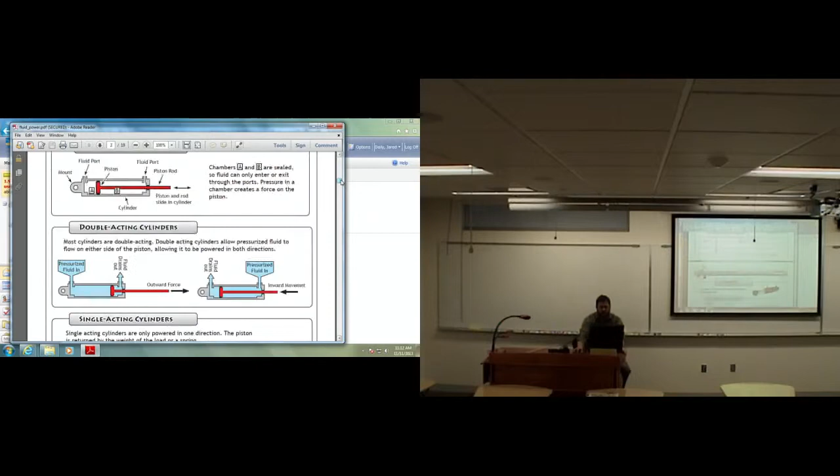So let's take a look at our hydraulic arm project here. I have three documents that I'm going to send you, where you're going to learn about pneumatics and fluid power. These are essentially workbooks. You're going to be learning some things, answering some questions, and doing some activities, all about hydraulics.

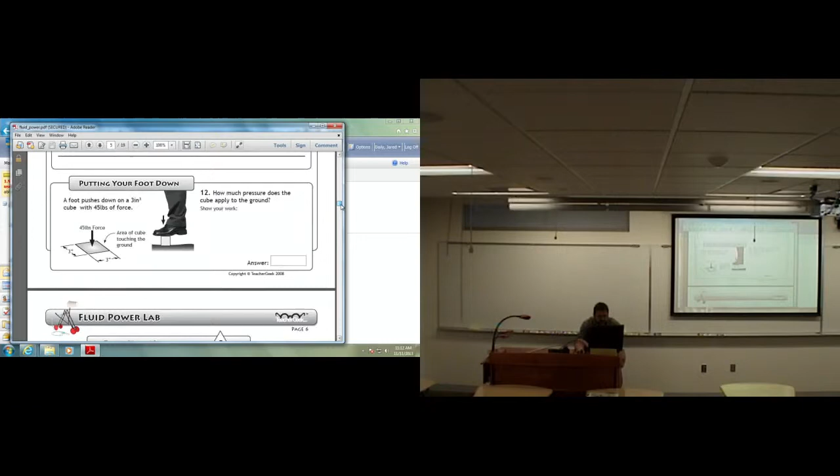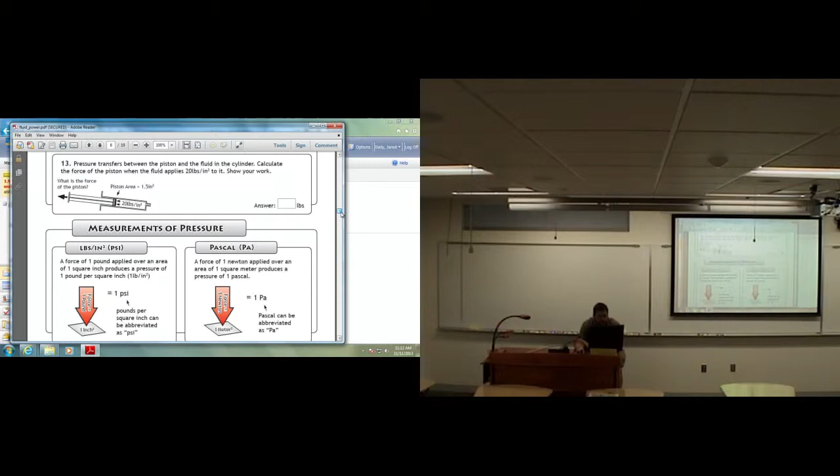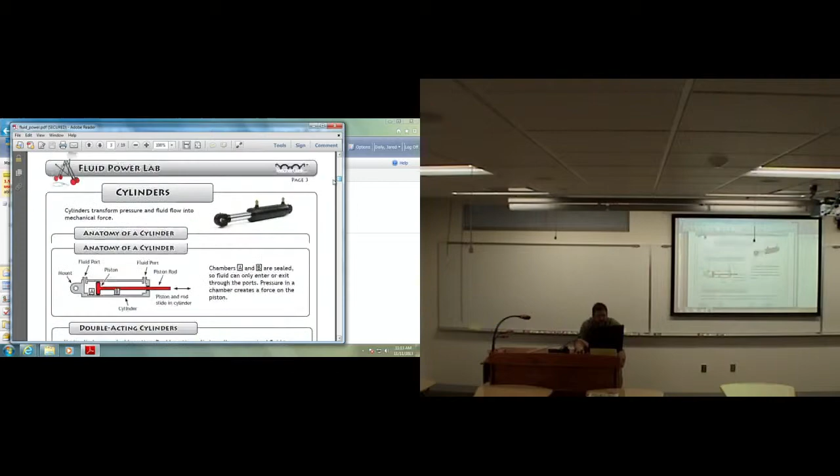And I will send these to you in an email. You have lots of different things to do here, including a little bit of math that's not terribly difficult, so it shouldn't be too much strain on you. If you have any questions, you can talk to me. But we're going to learn about some different laws of fluids and some different ideas with fluids, and we're going to do some simple calculations.

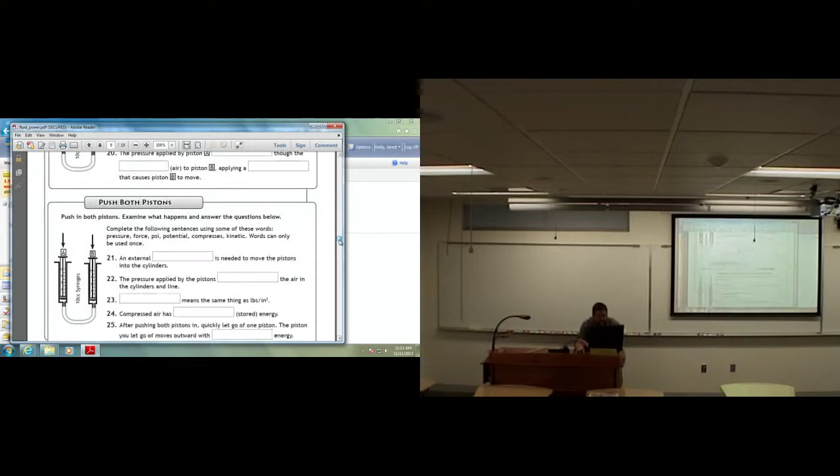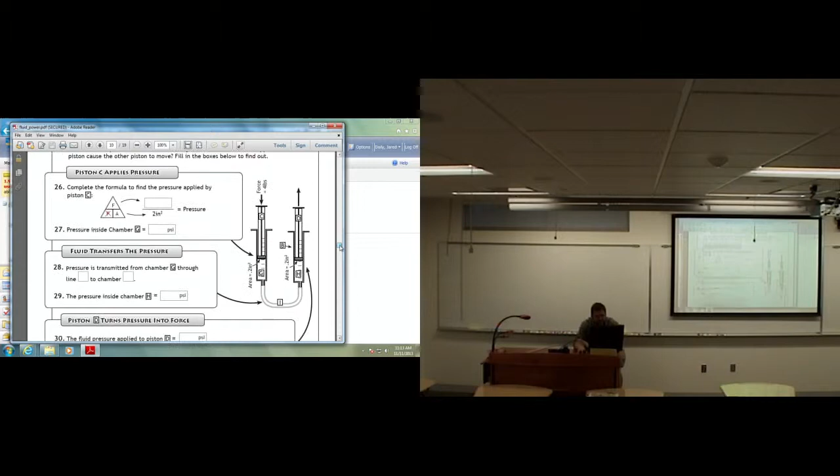Here's the first activity they have. So here we have an activity where we're actually going to put together a little hydraulic system, and we're going to do an activity and write down our results. Here they talk about viscosity, and then they do a very basic hydraulic system to lift a book. And then they talk about some work and mechanical advantage.

So this is fairly involved. It's got, I don't know how many pages, 19 pages on it, and it's a fairly complicated deal here. This ends up with an invention that you're going to make that uses fluid to power it — in other words, uses hydraulics or pneumatics.

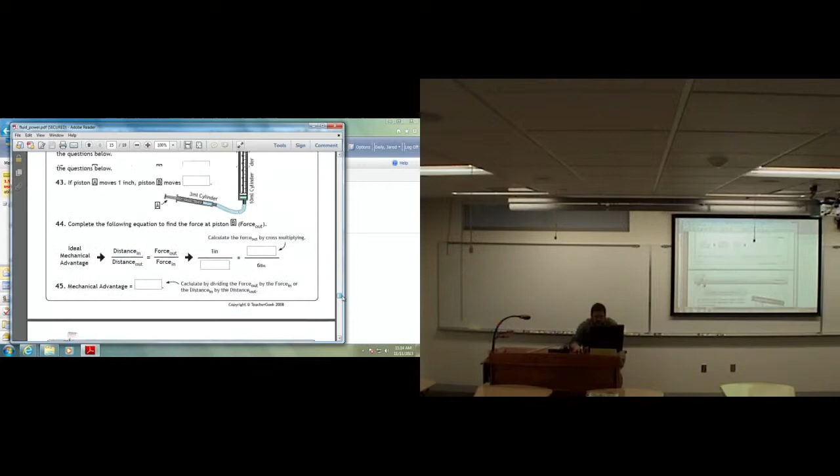And it's going to have to do one of these things: open a jar, crack an egg, or toss a ball. Now, when you're doing this kind of thing, you definitely want to go as simple as you can. The more complex it gets, the more problems there can be, more holes that can be poked in your invention. But in the end, after doing all these activities and all these different kind of homework type problems, you're going to make your own little invention at the end of it.

19 pages long, so you will have until Wednesday to work that out. Now, it's a fair amount of work as far as sitting down and writing things, but you don't actually have to build anything very complex to get that done. It's mostly basic beginning stuff.

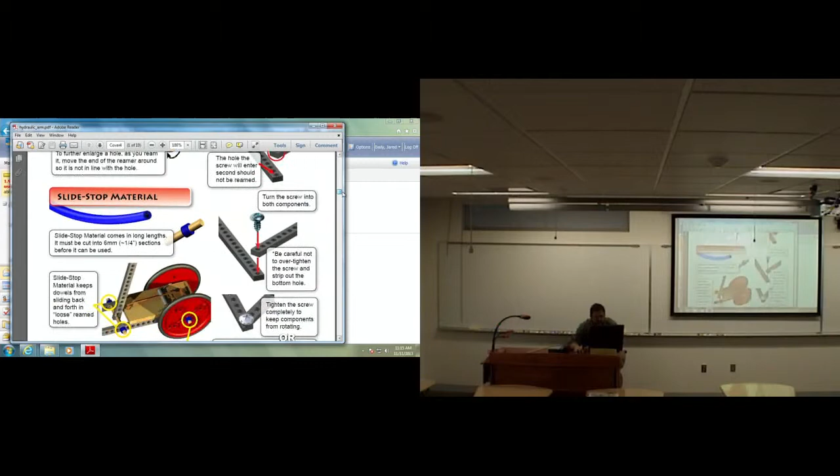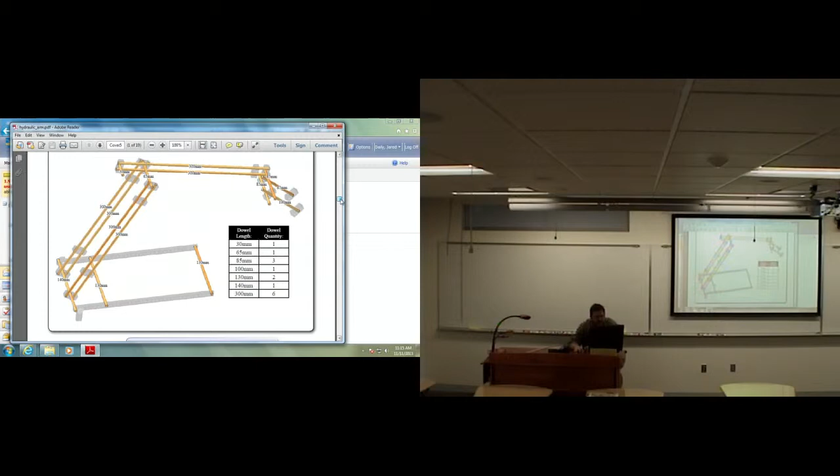The second one I'm going to send you is called the hydraulic arm, where you're going to put together a hydraulic arm from the materials I've given you. Now, I don't think you should have the proper number of materials for this project. It looks like it requires quite a few dowels, which I didn't provide for you. And is this actually the arm I want you to do?

Let's look at a different one. There's a different one I want to look at. This one is the very advanced arm. No, that's not the one I want to do either. So I want to do this one.

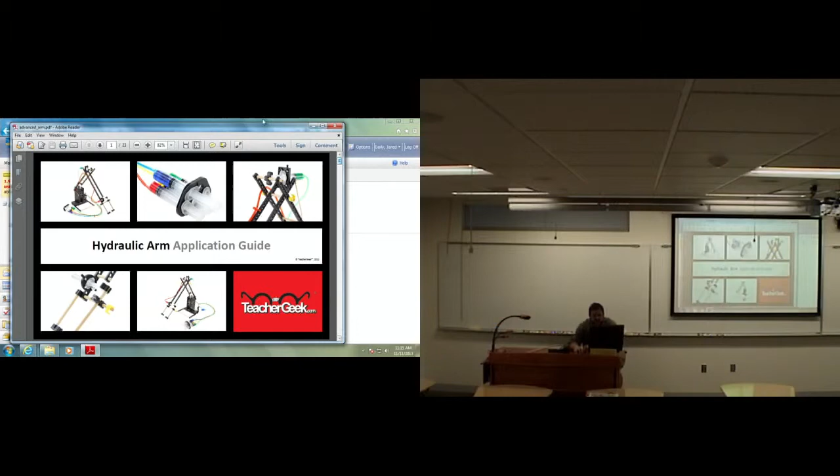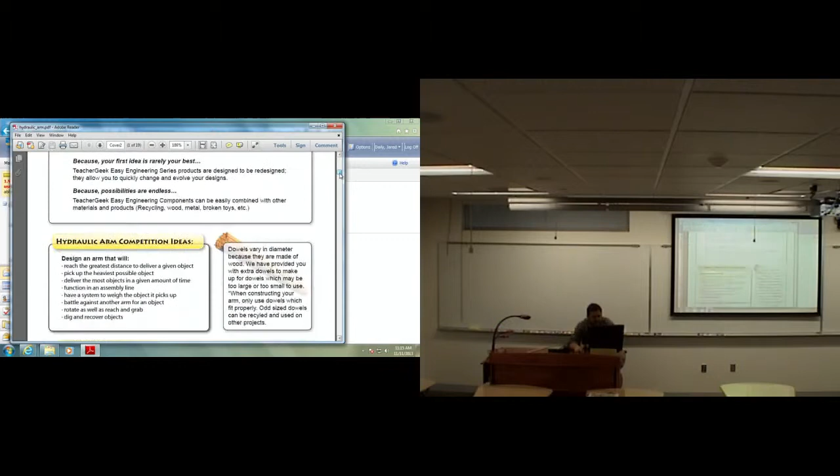So this is the second one, the second page of the paper I'm going to give you. It's also 19 pages, and they have you using these plastic arms and dowels and everything else, but you're not going to necessarily have all the parts left over to do this. So you'll have to decide what substitutions to make and how to use the parts you do have to accomplish this task.

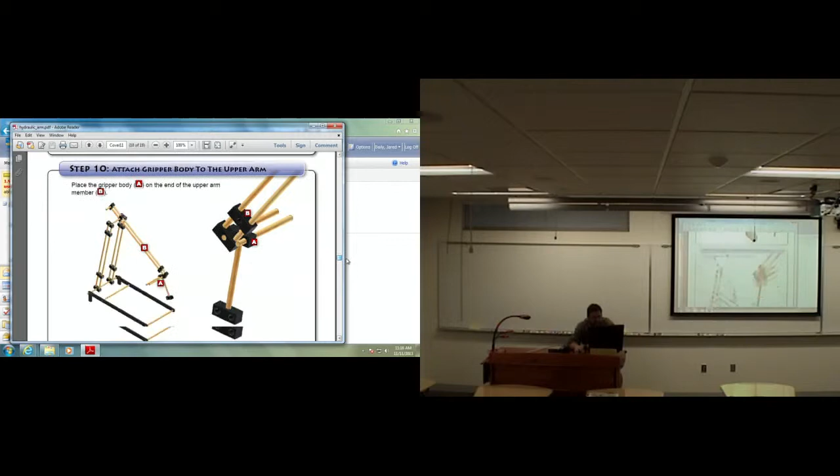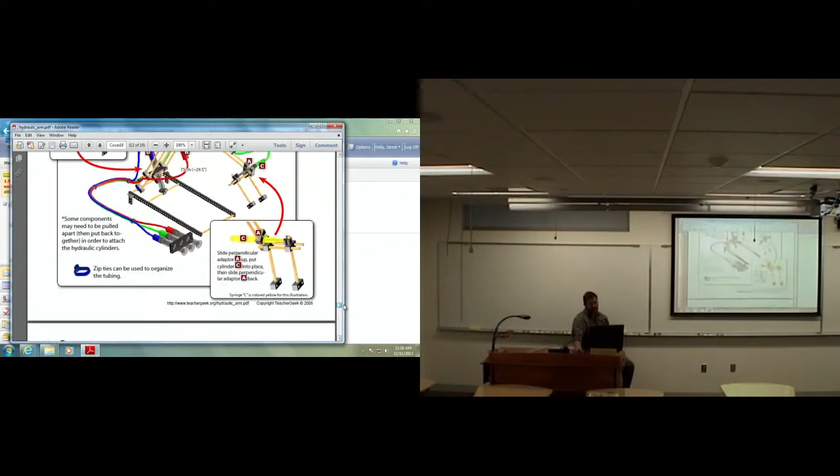They're giving you an example of what can be done, and your design is going to have to be very close to this in order to make this thing. But the end result, if we go all the way to the end, is a hydraulic arm that can pick up something like a deck of cards, or something similar in size and weight - a little bit less than a quarter pound, or so.

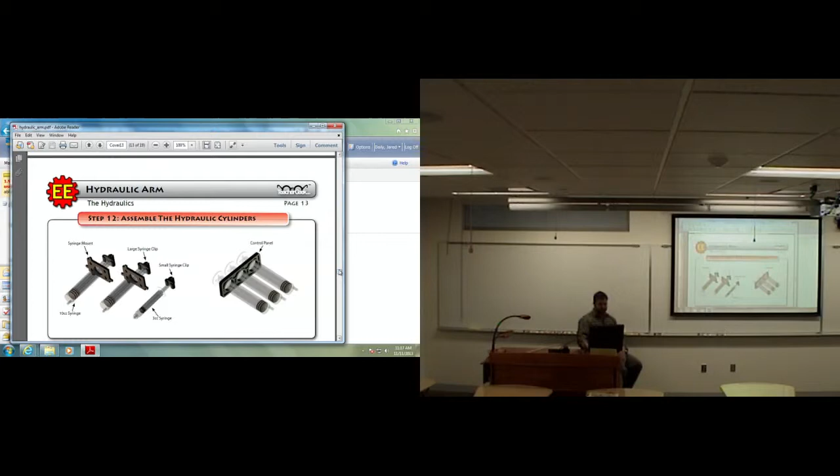But it can do it by being remotely controlled. Remotely meaning there are tubes connected to some syringes that you're going to manipulate, and you're only going to manipulate the syringes at one end of the tubes, while at the other end your machine is going to be doing this work. Right?

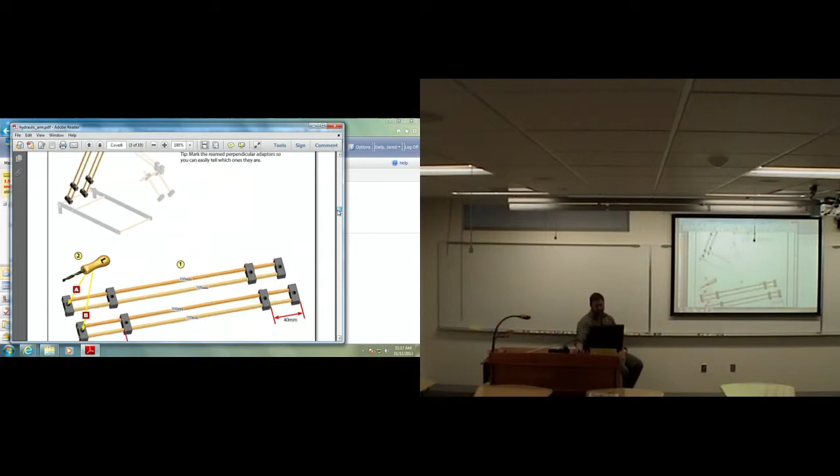So I've got these two sets of paperwork to send you. One of them is a learning guide, essentially. The other is a project guide for this hydraulic arm project. And while they give you precise instructions here, I have not given you the materials to follow these precise instructions. So you're going to have to take the initiative and modify these instructions and redesign so that it will fit the materials you have.

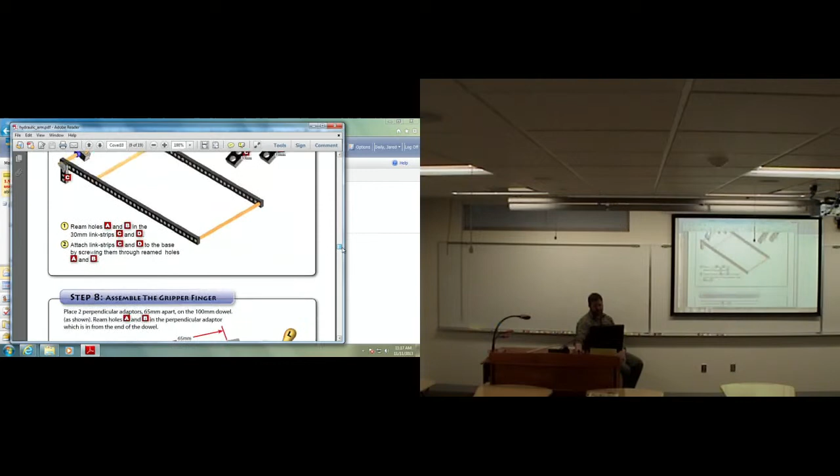Again, a very important engineering process - to be able to take something somebody else has done, a design somebody else has made and given you instructions for, and to adapt it into your situation. So you could think of this as a reverse engineering process almost, where you're not doing all the original design, but you're kind of doing a redesign and fixing it to fit what you can provide.

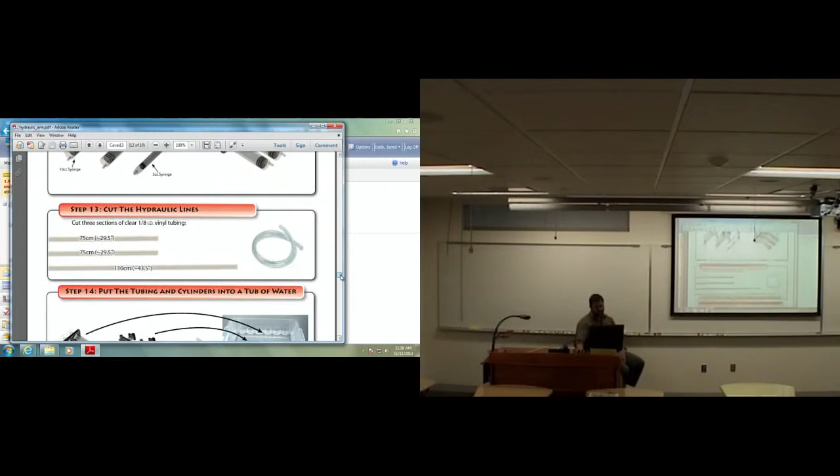And I've given you a lot of materials for this, but not the ones that they called for, like I said. So I expect that everybody's design will be somewhat different, but that they will all accomplish the same kind of thing, right?

So I will send both of these documents to you, and it will be your job to complete the first one by... let's see, is that right, by Wednesday? Actually, the first one I'll have you complete by Friday. So you have this week to complete the first assignment, which includes lots of written problems and some small experiments.

And then the next one will be due before Thanksgiving. So you'll have a week and a day or two to work on the next one. Or if you finish the first one early, you can get started on the second one.

Each day in class between now and then, I will be going over different parts of this to help you through it. So I'll start off with a basic introduction and overview today. Then on Wednesday, I'll go through some more of the first one, and on Friday I will show you some hydraulics experiments to give you more ideas. Today I'll also go through some background of hydraulics, so you can understand the concepts behind it without having to reinvent the wheel or take a whole class on this stuff.

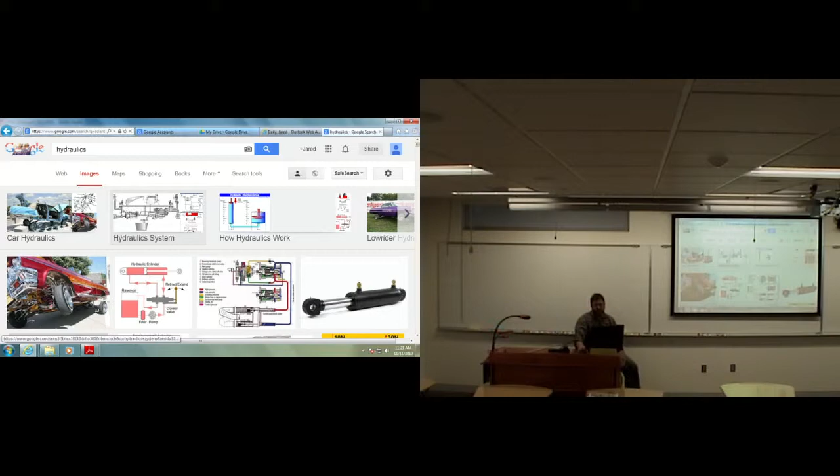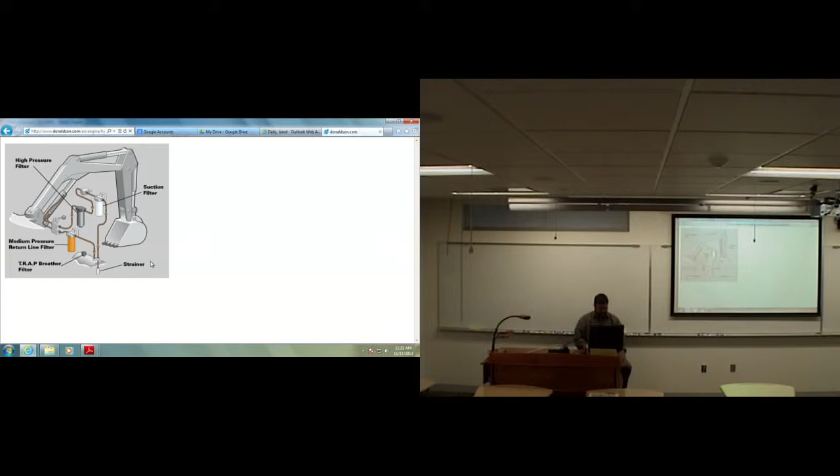Hydraulics are used in lots of different systems - there are so many different systems where hydraulics are used. Probably the most common one is something like this with a tractor. You have lots of different kinds of tractors that use hydraulics to control the arms for bucket loaders and end loaders and whatever. I'm sure you've seen these pistons, and you kind of understand how one piston lifts the arm, another piston rotates the arm, and another piston rotates the bucket, and so on. You probably understand kind of how that works, but you may not understand what is behind the science here.

For example, you see here there are lots of different components connecting to each of these pistons out on this big hydraulic arm. There are tubes connected to boxes, connected to filters, connected to pumps, connected to tanks, or whatever they're connected to. You may see all these things, but you may have no idea what's actually causing these pistons to move or what gives them such power. You may be surprised, actually.

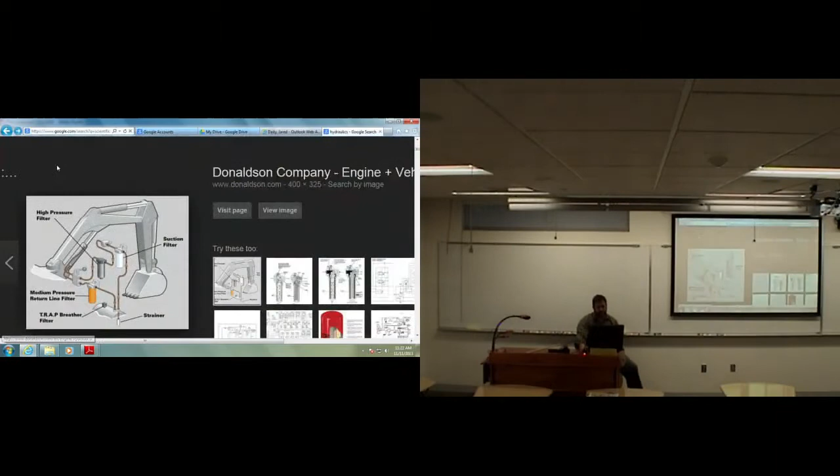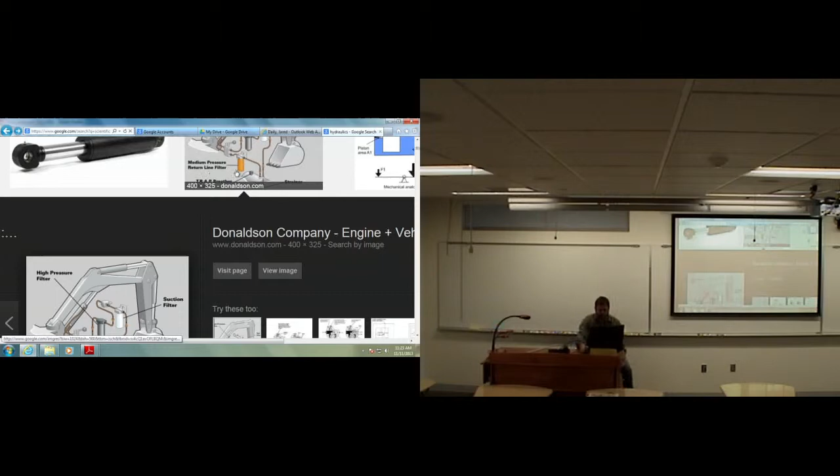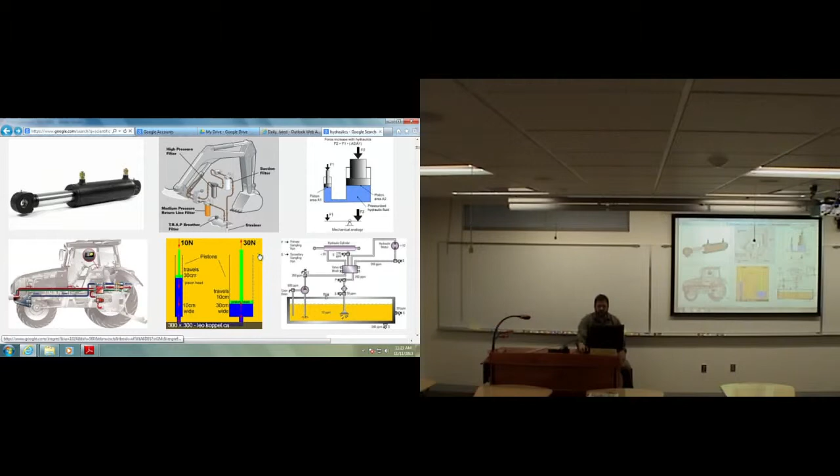The simplest form of a hydraulic system is the lift. Let's close that. So the simplest one is the lift, and this is a very simple representation of a hydraulic lift.

Hydraulics take advantage of a principle called Pascal's principle. Pascal's principle states that when you have a liquid or fluid inside of a closed space, the fluid inside is an ideal fluid - in other words, it won't change volume if you apply pressure to it. It's not compressible, and it has very low viscosity. Also, the whole system is essentially at the same level - one end isn't 100 feet above the other. It states that when you apply a pressure to one part of the fluid, that pressure will spread itself out throughout the entire fluid. So we take advantage of this principle in these systems.

In this particular system, we have a little piston over here that has a very small cross section - a very skinny piston, very skinny cylinder rather, with a skinny piston inside of it. So the piston is this arm stuck down inside here, and the cylinder is the tube it's stuck inside of. On the other end of the system, we have a wider piston, or bigger piston, with a bigger cylinder that it's inside of - so it's sticking down inside this bigger cylinder.

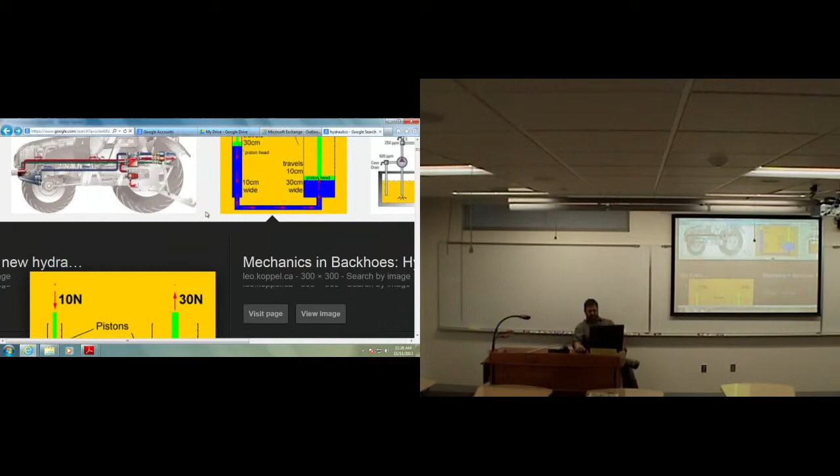Lots of things work out this way, not just these examples - that's exactly how they do it with tractors. If we go back to our tractor picture, you can see these cylinders are quite large while these tubes back here can be quite small, because it doesn't matter.

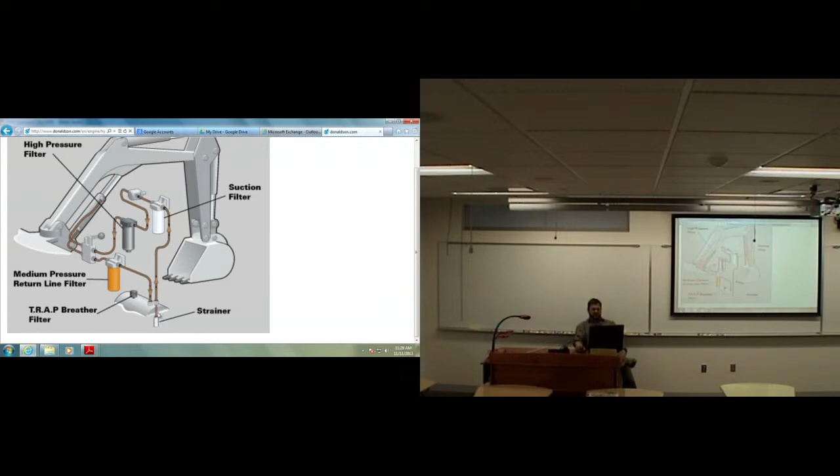Way back at the very beginning of this system, there's a pump somewhere applying pressure into a small piece of tubing or a small cylinder, before all this stuff happens. That small force is going to exert a much larger force on this arm, allowing you to dig a ditch or a hole or whatever you need to do with this backhoe.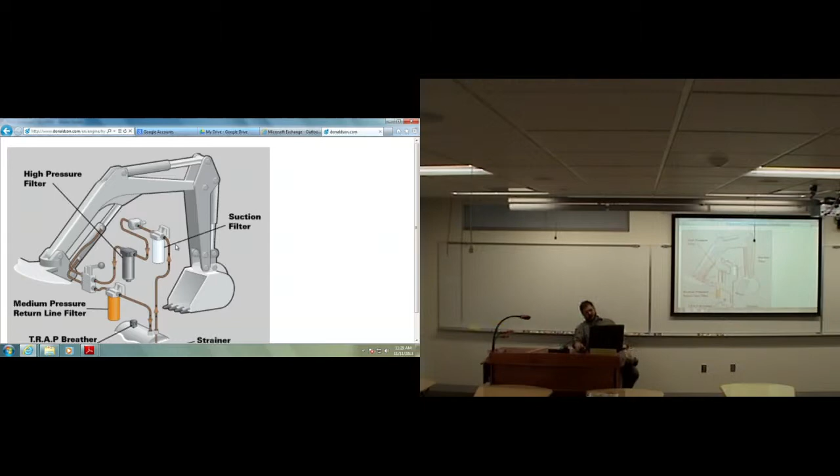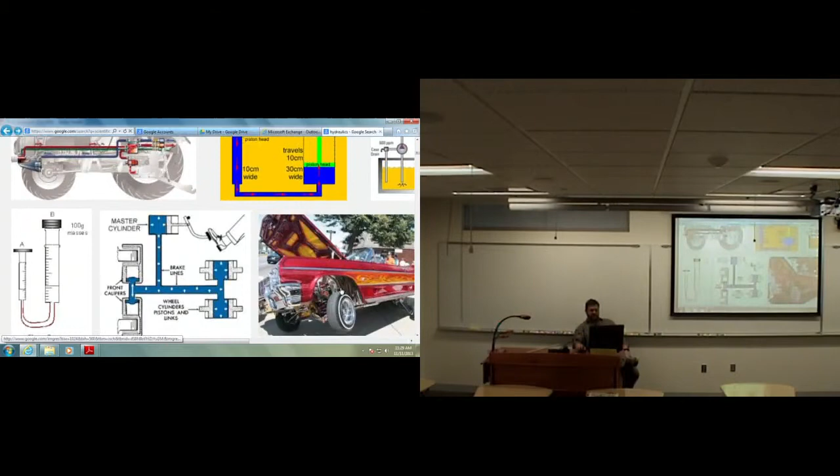That is the basic idea behind hydraulics. Like I said, there are myriad uses for hydraulics - you can even make crazy, funky cars with hydraulics. Here's a nice illustration of how brakes work.

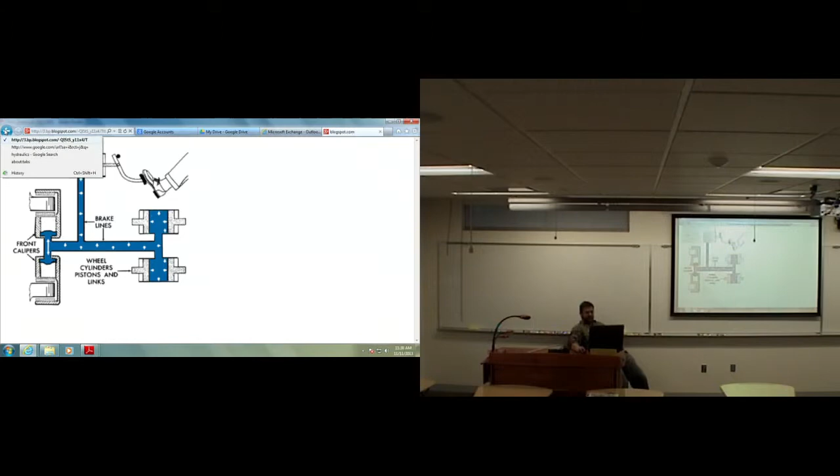Now, it may not be obvious to you here that the master cylinder and the brake cylinders are much different in size, but they are, and they should be. They're just not shown here as such. This cylinder here should be much smaller, but it's connected to all the brake cylinders. It's a direct hydraulic connection.

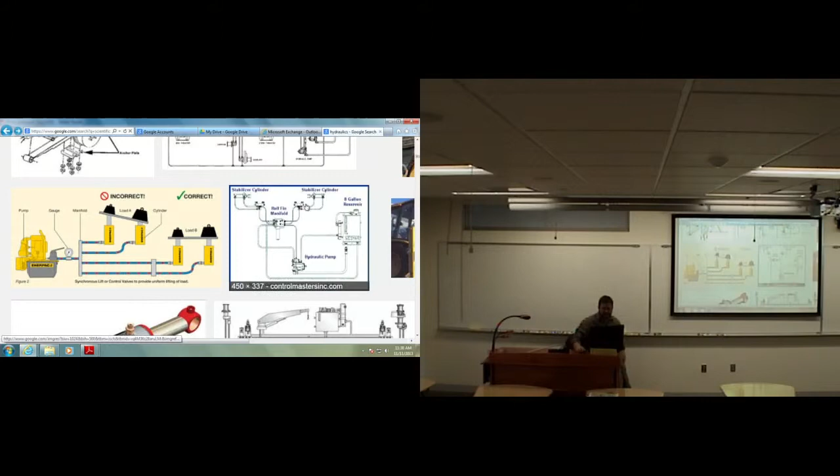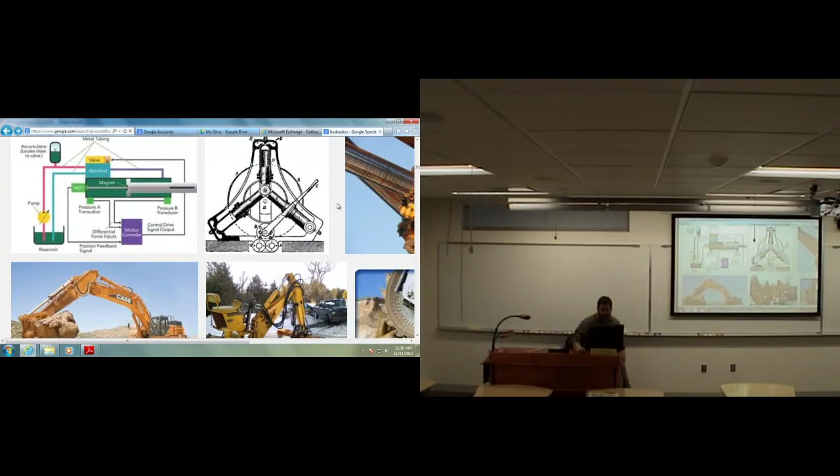Let's see if we can't find another illustration that's nice for you here. Normal hydraulics. Lots of different examples of things I would have told you. That's okay. Anyway, so your hydraulics.

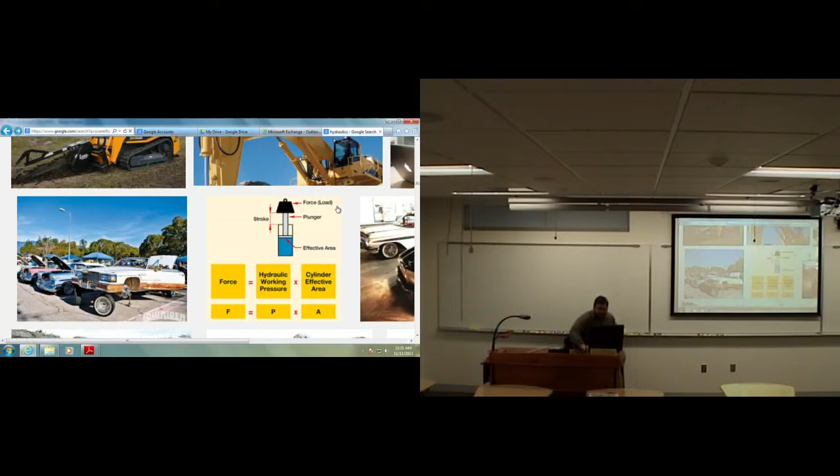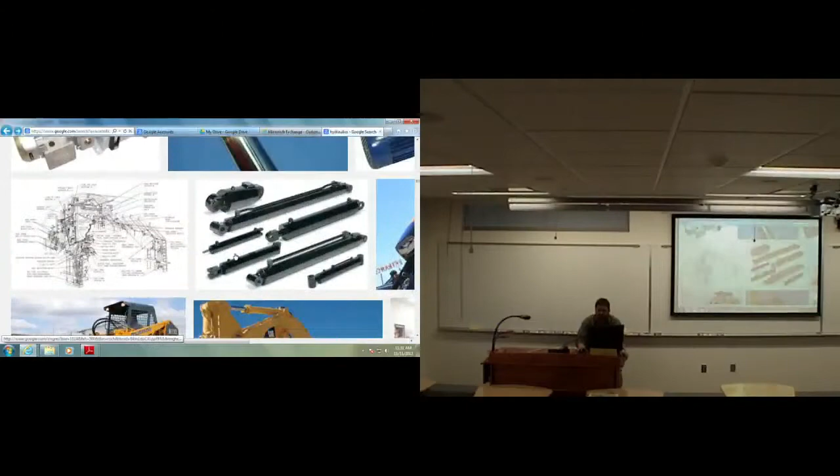Hydraulics is a very useful thing and very commonly used thing in engineering, so we need to understand how they work, and that's what we're doing in this project. So let's go back to our fluid power lab.

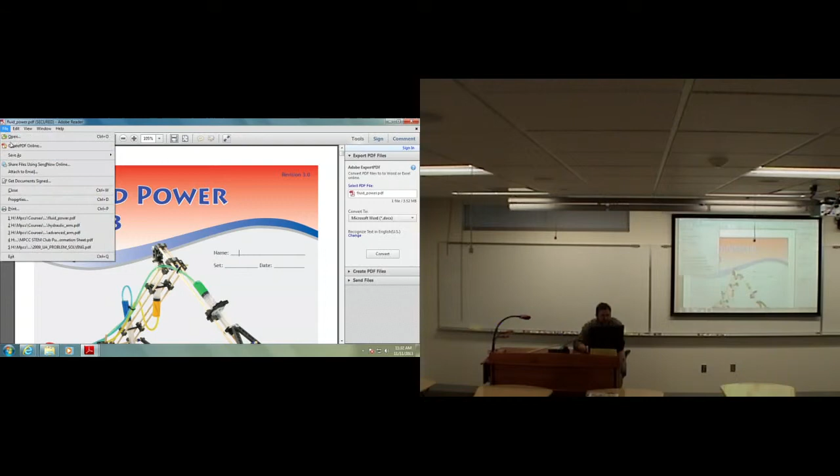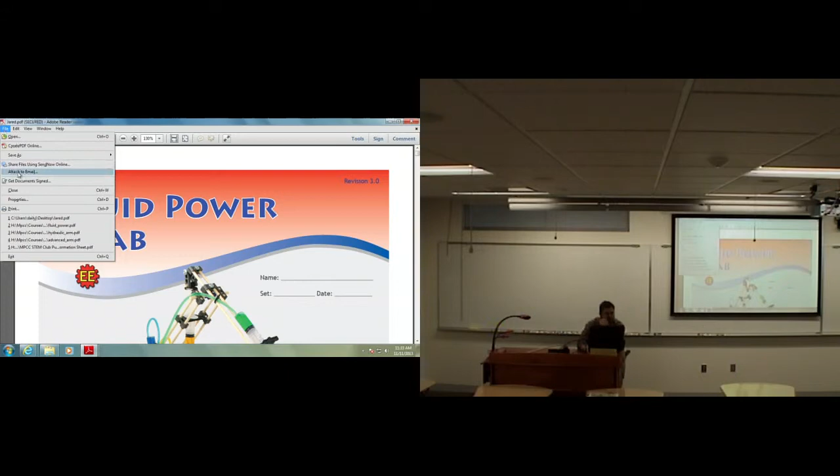So I guess it's got security features in it. So your other option is to print it off, or you can convert it to Microsoft Word online. That's usually something that takes quite a while, kind of a pain in the neck. You should also be able to save it as a different file. So if I save this, go to File and Save As a PDF, save it as my own thing, call it Jared, for example, and save it here on the desktop. If I open it up again on the desktop, let's see if it's still secured. Still is, but I think I can change that. So I'm going to go to Properties, security. It's not going to let me change it for now.

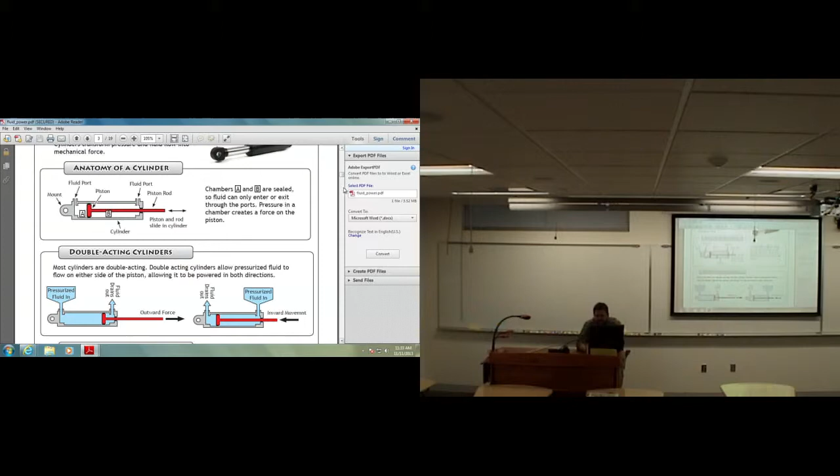I don't know why. It should let me change it if I make it my own file. Go to properties here. Yeah, apparently it won't let me write on it. So you can't write on it. Sorry, I lied. If you have Adobe Acrobat full pro version, you can do it, but you can't do it here. So we're stuck with just printing it off and writing on it that way, or converting it to a Microsoft Word document, which takes a while and has to be done. So let's not deal with commenting or signing or tools or any of this stuff. Let's just get rid of this crap. How do I do that? How do you open this up? Let's go back to where it was.

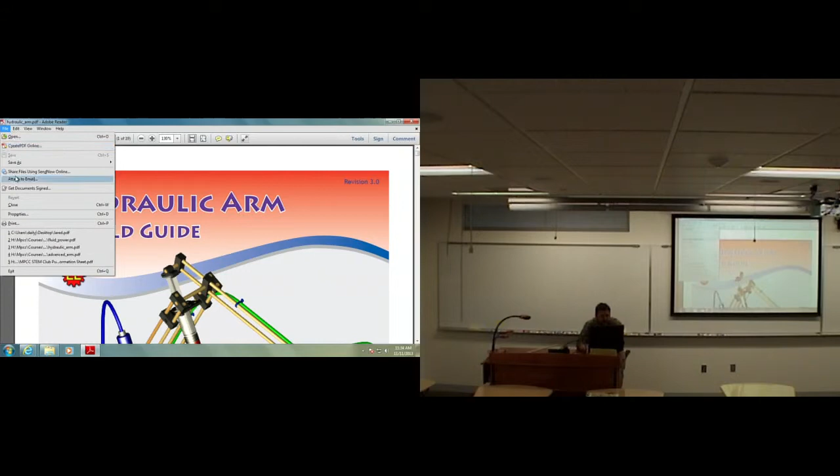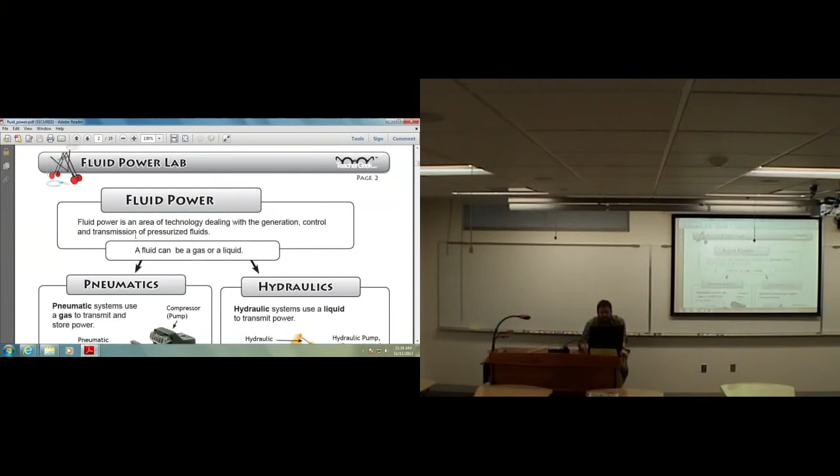There we go. Okay, so here we go. Apparently you can't write in it, so that's just tough luck for us. But let's look and see this. We've got the beginning of this document, which splits fluid power into two different systems, hydraulics and pneumatics.

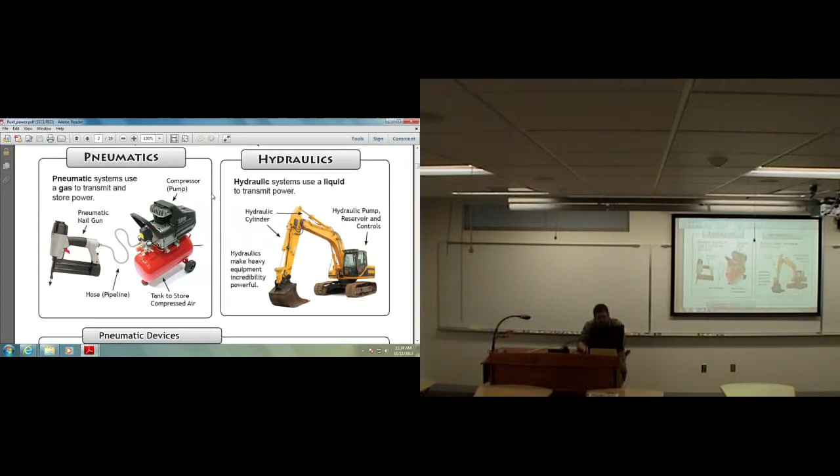Hydraulics is what we were just looking at, which uses a liquid, usually an oil. Pneumatics uses similar principles but uses air to transmit power. We're not going to be doing a pneumatics project. Dealing with pneumatics is actually a little bit difficult and actually kind of dangerous in some cases.

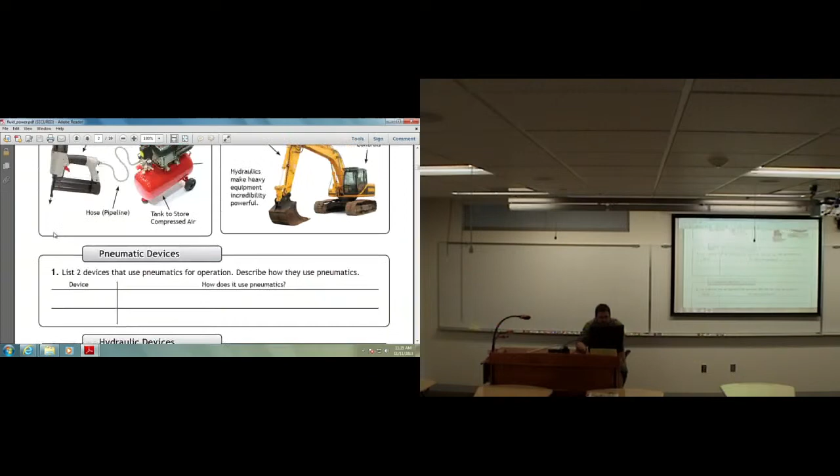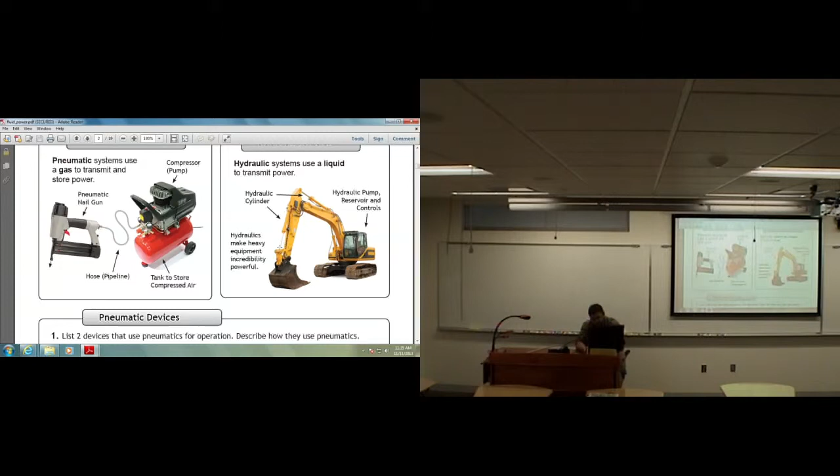But they want you to list some devices that use pneumatics. Up here they've got a nail gun. I want you to find something different than that, right? They want you to list hydraulic devices. Up here they show a backhoe or just a mechanical shovel, whatever you want to call it. I want you to find a different one, right? Two different ones, actually, in each of those cases.

Then they go on to talk about cylinders and how they're made, how they've got different ports on them. They've got a piston down the center and the cylinder in the middle.

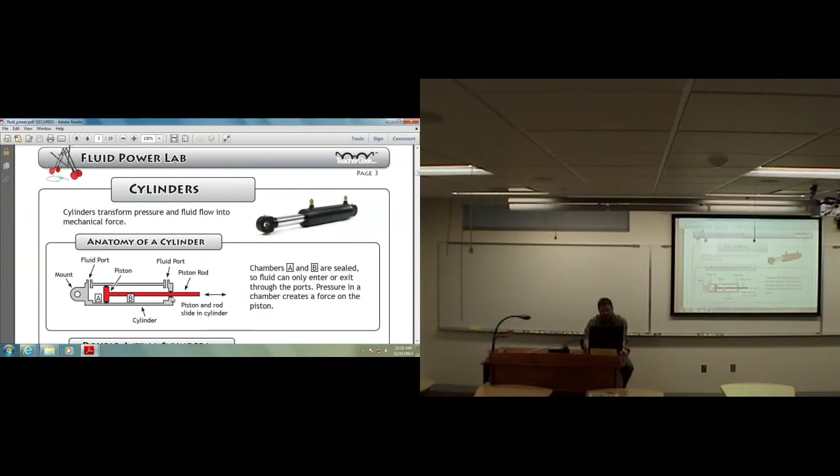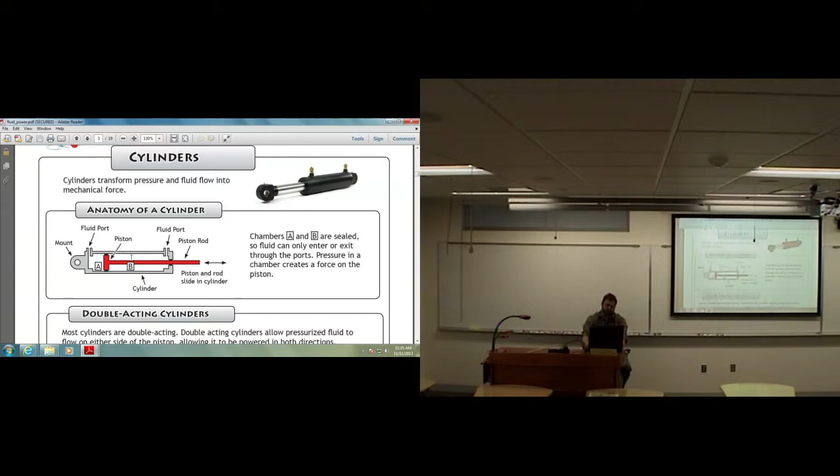Oftentimes they have a mount on them so that they can be mounted to an object. What's the point of the fluid ports? That's where the fluid comes in so the change in pressure can be felt in this cylinder. Sometimes the cylinders have a fluid port on both sides so the cylinder can be pushed in either direction. Sometimes it only has it on one side because it only needs to be pushed in one direction, depending on the system. In the case of tractors, it will have fluid ports on both sides because you want to be able to push and pull your tractor arms, not just allow gravity to do one or the other.

Here they talk about double-acting cylinders, and here they talk about single-acting cylinders, how they only have fluid pressure on one side.

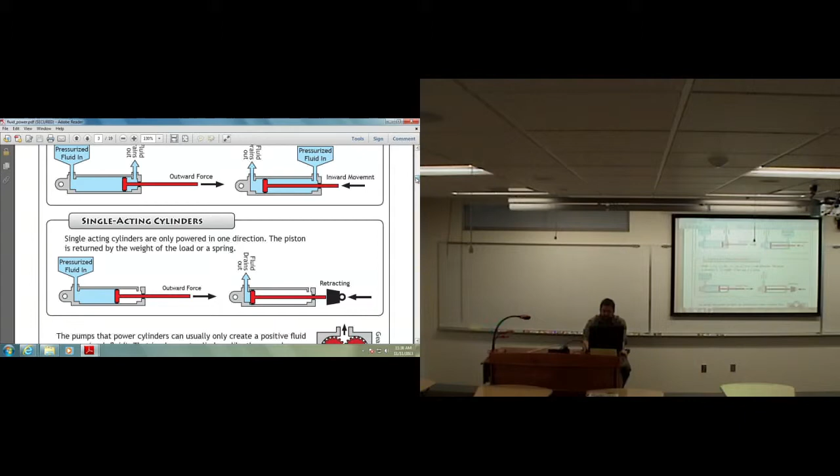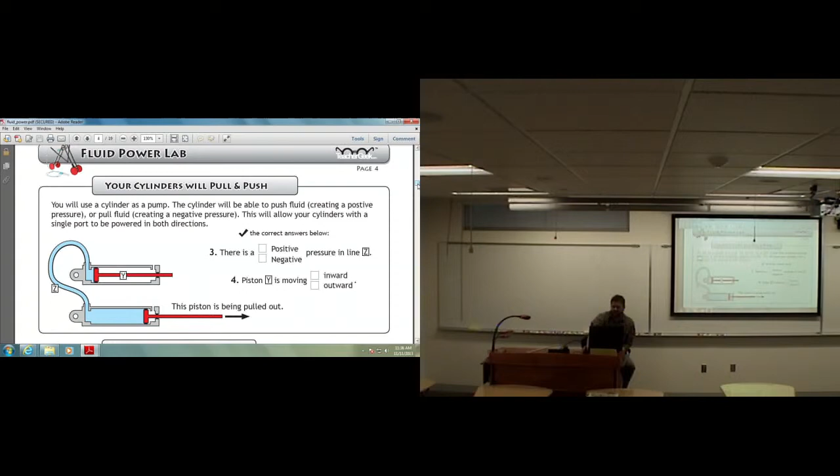Then they have some true and false questions here, I guess. Positive, negative, true, false, inward, outward. It's essentially just one answer or the other.

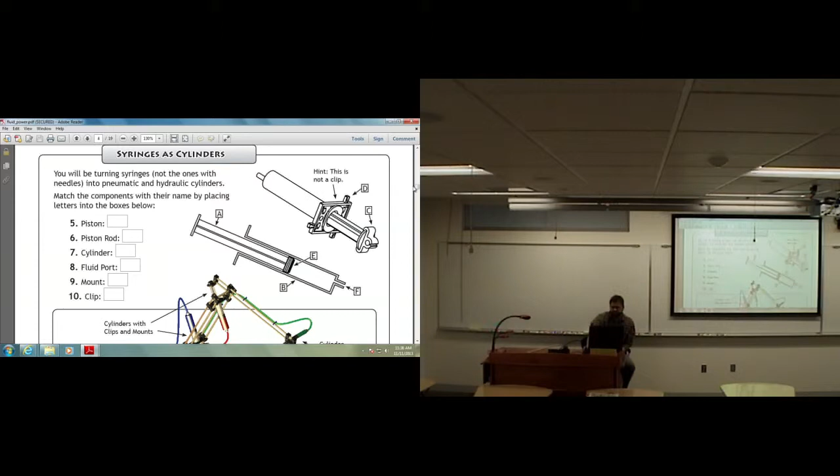Down here they show you how you're going to build a cylinder. We're going to be building a cylinder out of syringes, so you're going to match up the different components in the syringe—A, B, C, D, E—with the different parts in the cylinder from the previous picture. So you're essentially identifying the parts of your cylinders and pistons, which are syringes.

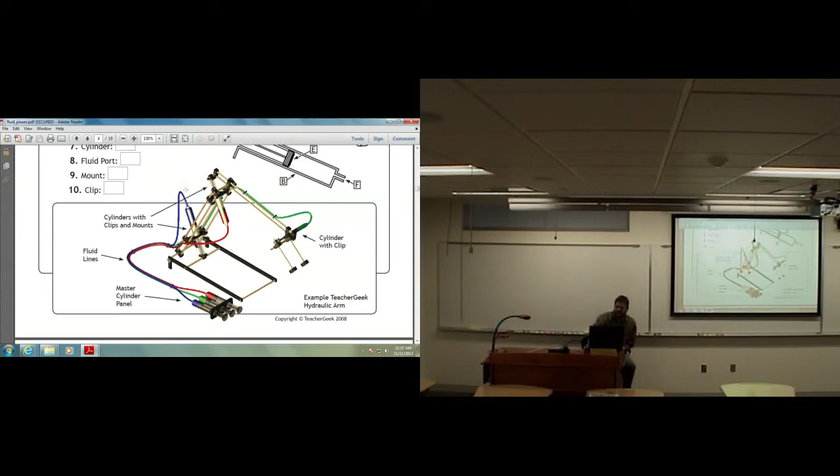Then they start to show you how these are going to eventually be used. We have cylinders that are going to be our master cylinders, three of them in this case. We have fluid lines. We have cylinders that are going to be our power cylinders at the other end, and so on and so forth.

Then here they talk about pressure. Now this is where it begins to be a little bit mathematical. It does say that this class doesn't require any previous mathematical knowledge, but we're going to teach you what you need to know right here. So that's still true, it's just a little more—we're going a little bit beyond, I guess.

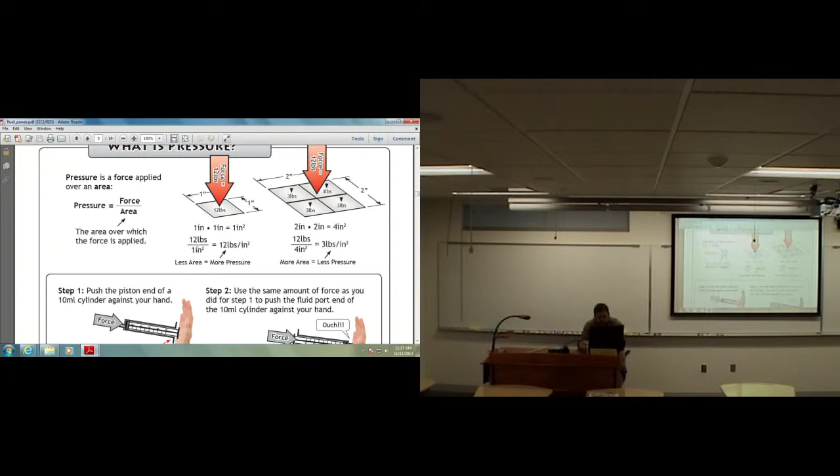Pressure is just equal to force divided by area. So if you apply 12 pounds of force over a 1 inch by 1 inch square area, you get 12 pounds per square inch—12 pounds being your force, 1 inch squared, or 1 times 1 inches, equals your area.

If you apply the same force over 2 inches by 2 inches, 2 times 2 is 4 inches squared, you get 12 pounds per 4 inches squared, and you simplify 12 over 4 into 3. So the same amount of force spread over more area gives you less pressure.

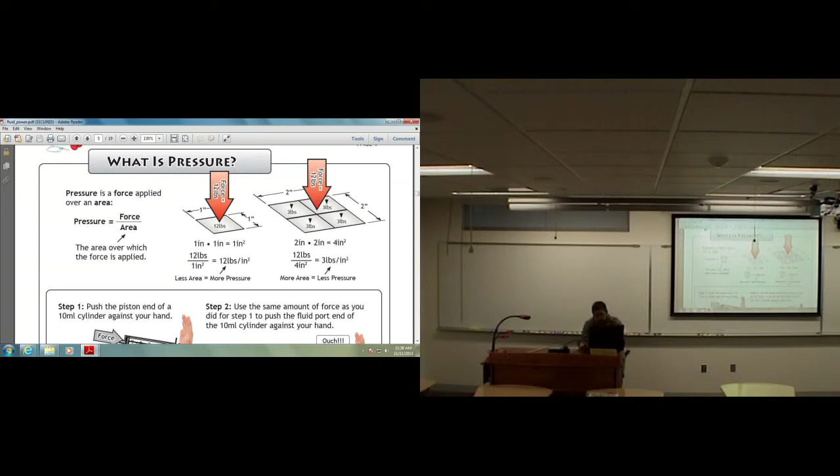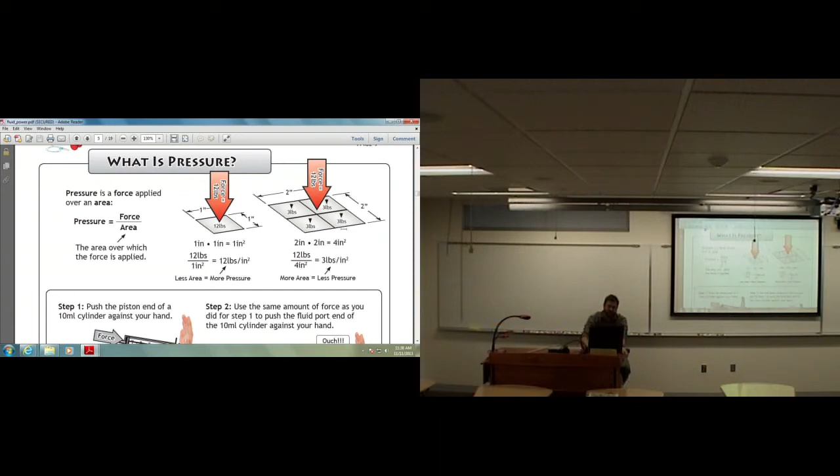That's actually the reason why they don't allow people with high heels to walk in the gymnasium. Because instead of having 100 pounds spread over their entire shoe, people with high heels have 100 pounds concentrated onto one part of the shoe. That exerts an extremely high pressure at one point on the floor, and it puts dimples in the basketball floor, and the basketball coach gets pissed off.

The volleyball coach doesn't care so much, because in volleyball you don't want your shoes to stick to the floor so much as you want your body to slide across the floor as you dive. So, anyway, that is that. And then here they talk about...

How you can actually feel those forces. If you apply a force to one end of a syringe and press on it to compress it, it doesn't hurt so much to press on it. However, if you apply that same force to the fat end of the syringe while your hand is on the skinny end, it will poke you and can hurt.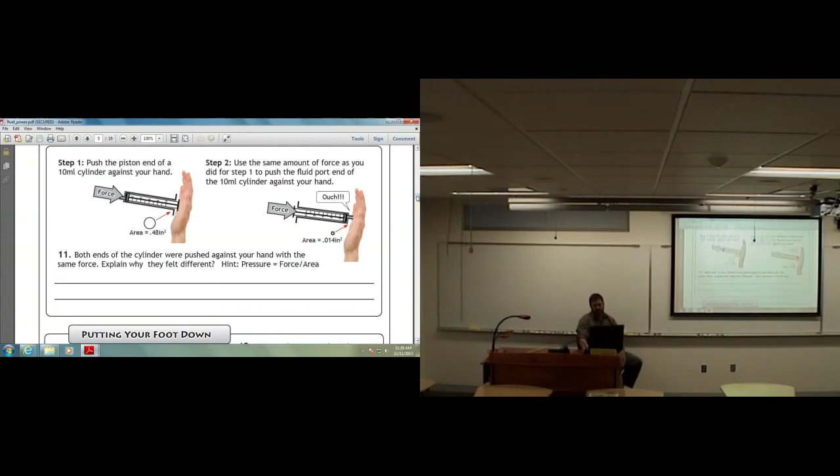This is also the reason we use knives to cut meat and not hammers. A knife has a very, very small cross-sectional edge, so when you press on it, it applies an extreme amount of pressure at the edge of the knife, whereas a hammer spreads the same force out over a much bigger area and just smashes the meat. They have lots of different examples here, and then they have some exercises where you can use the equation pressure equals force over area in many different ways.

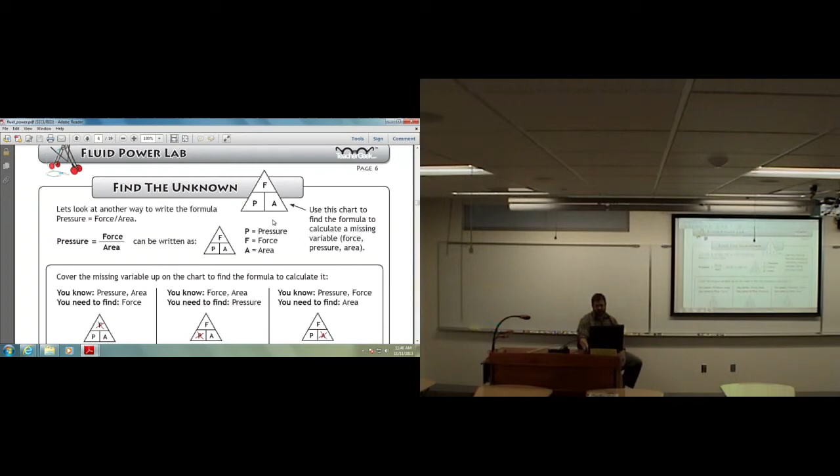If you know two of these things, you can find the third. They use this triangular chart where you have pressure, force, and area. You can use it to find one or the other. If you cross out the one you're trying to find, you can create an equation that gives you the other two.

So if you cross out F, you have pressure and area next to each other in the chart, which means that pressure times area equals force. If you cross out the pressure, then you have force over area as your equation, because force is on top, force over area.

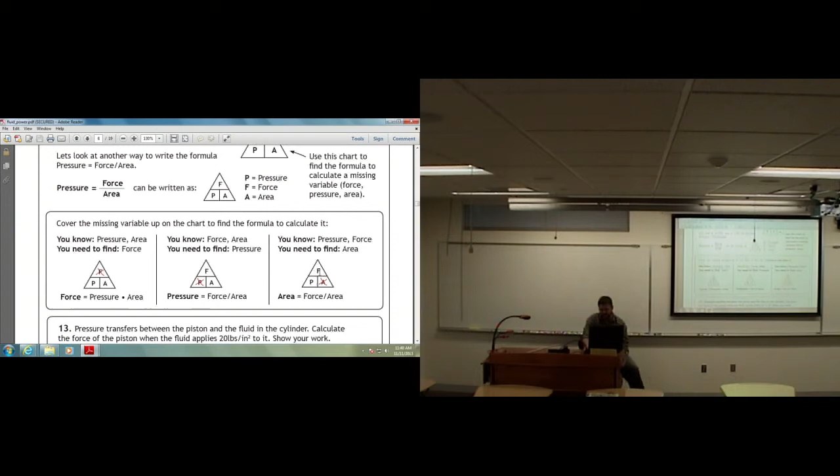If you cross out the area, then you have force over pressure. They actually have a typo here. It says area equals force over area. It's not. It's area equals force over pressure. So this needs to be replaced with pressure. But this little chart helps you solve these equations.

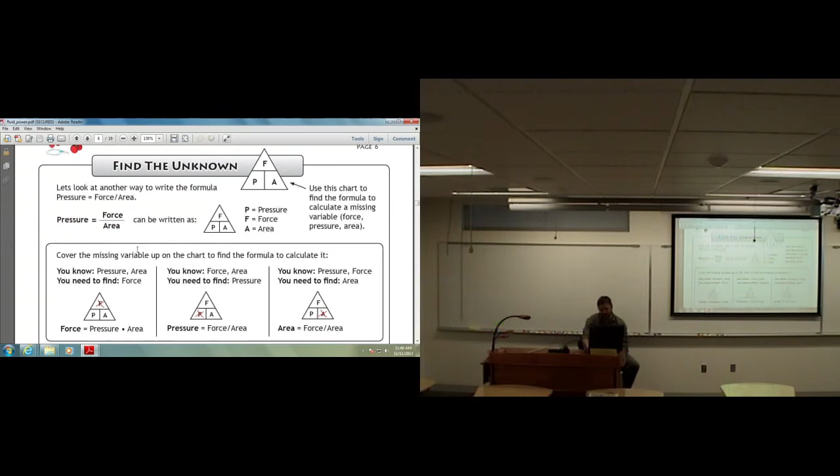Now, if it's no problem for you to just solve this equation for one of the variables, you don't have to go through that rigmarole. But if that confuses you, then you can use this chart to figure it out. They essentially give you these three equations that you can use.

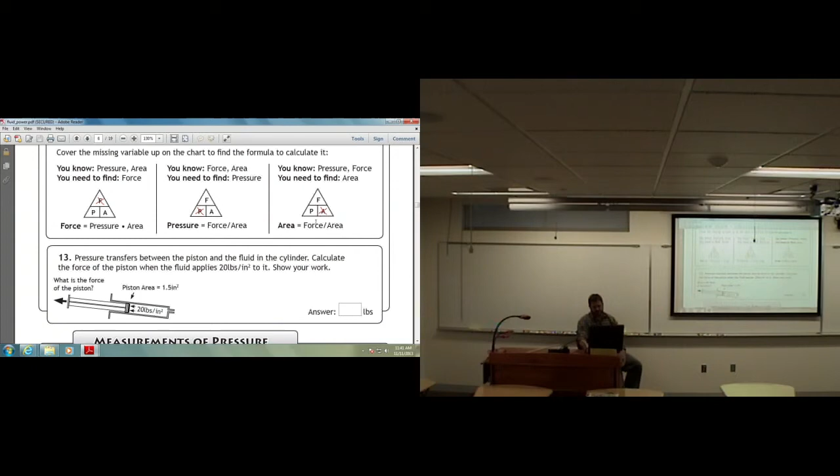If you want to find the force and you know the pressure and the area, use this one. If you want to find the pressure and you know the force and the area, use this one. If you want to find the area and you know the force and the pressure, use this one. Just make sure it's written correctly - this should be force over pressure.

Then you can calculate the answer to this problem: calculate the force of the piston when the fluid applies 20 pounds per square inch, which is the pressure, to the area they give you, which is 1.5 inches squared. So they've given you the pressure and the area. You know the pressure and the area, so you multiply them together to get the force.

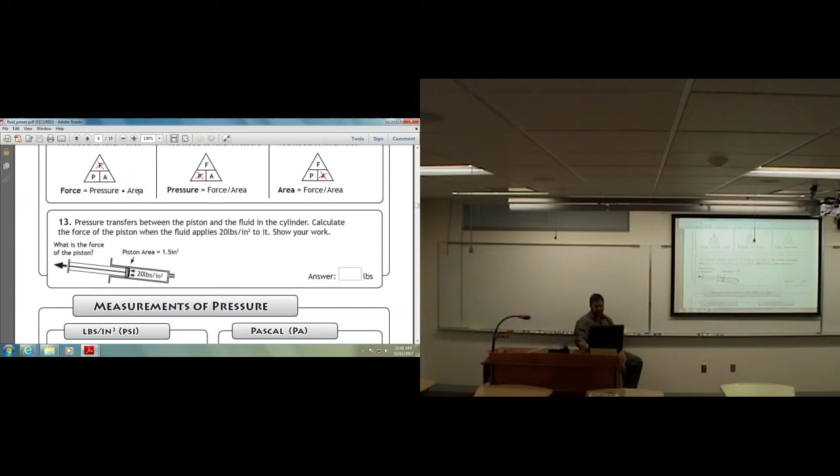Here they talk about measurements of pressure. There are two different units of pressure used regularly in the United States: pounds per square inch, PSI, or Pascal, which is newtons per meter squared. A newton is about, like I said, it's about... no, it's not 2 pounds. It's 0.2 pounds. 10 newtons is about 0.2... wait, 1 newton is not very much weight.

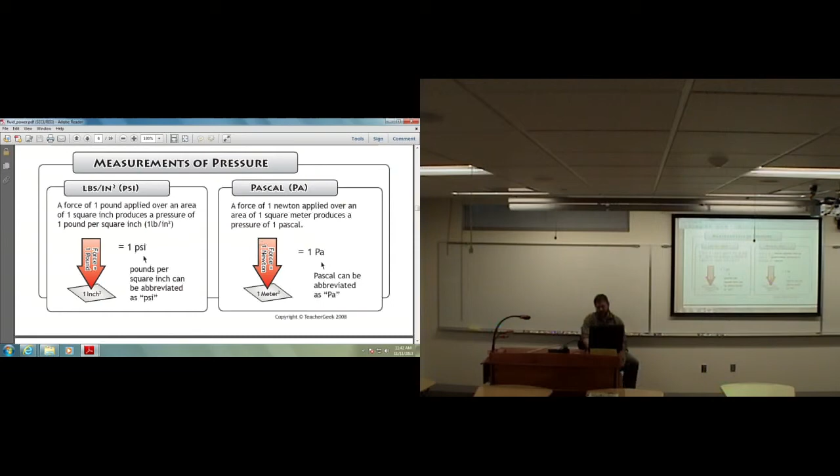For example, I think I weigh 1,000 newtons or something like that. So 1 newton has got to be about 0.2 pounds. 10 newtons is 2 pounds, whatever - that's not very much. 1 pound per square inch is actually a lot more pressure than a pascal. But they're both measures of pressure.

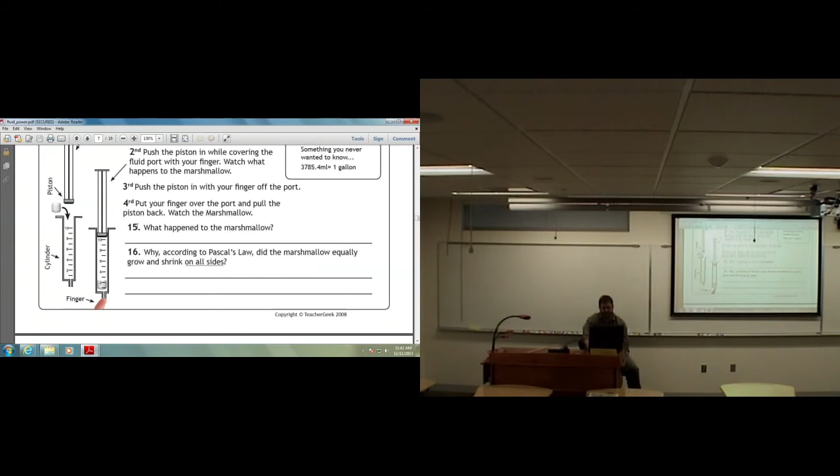Then they go on to your first lab, where you're going to actually build a little piston machine that's going to lift a book eventually. So you're going to do some little experiments, measure some things, and then do that. That is all I've got for you today to get you started on your first part of the pneumatic arm project.

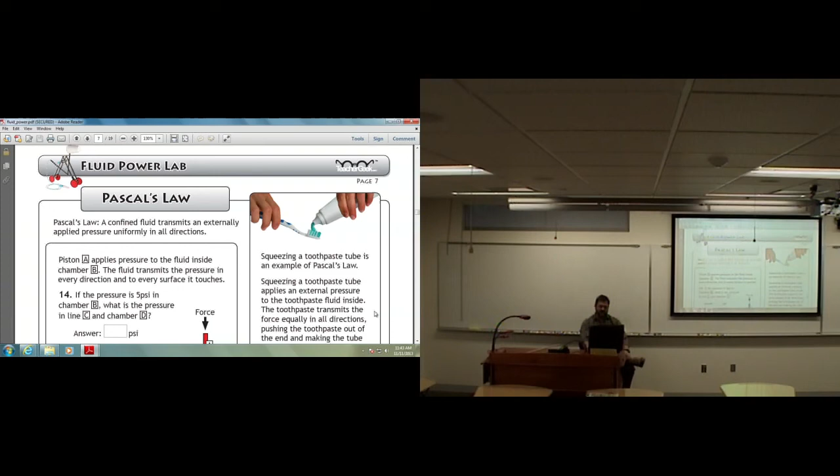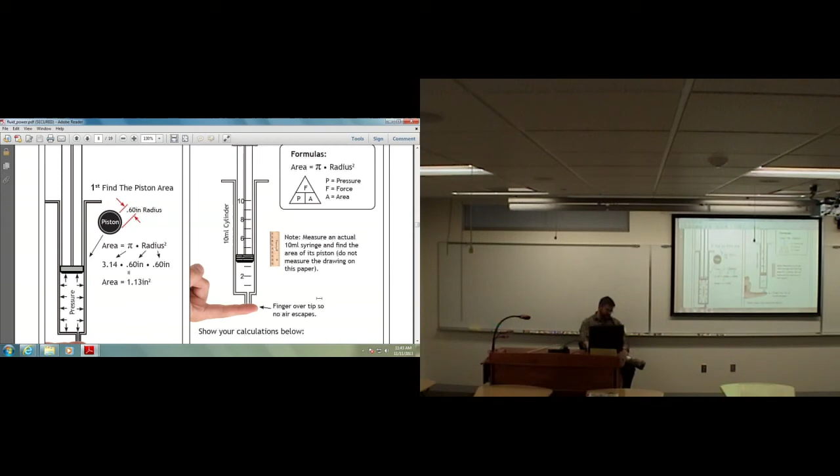Do you have any questions about this particular activity?

You guys good there in Stapleton? Give me a thumbs up in Stapleton if you're good to go. Can you guys hear me in Stapleton? You guys good to go in Stapleton? Okay, well, for some reason they're not answering me back. But anyway, we'll see you guys later.